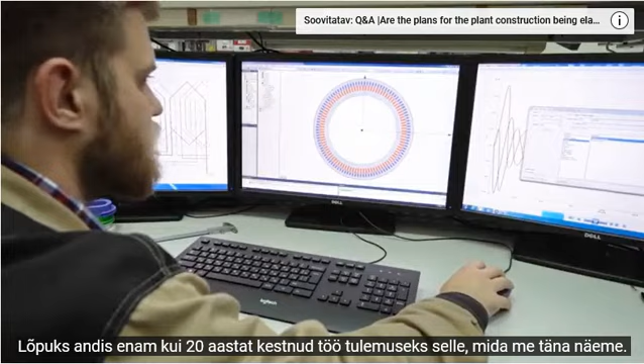Of course, it was only the first step, and there was a large scope of work for Duyunov's team down the road. There were patents obtained and research conducted. The combined winding technology was put in practice. Various induction electric motors were designed and modernized. Finally, more than 20 years of work resulted in what we can see today.

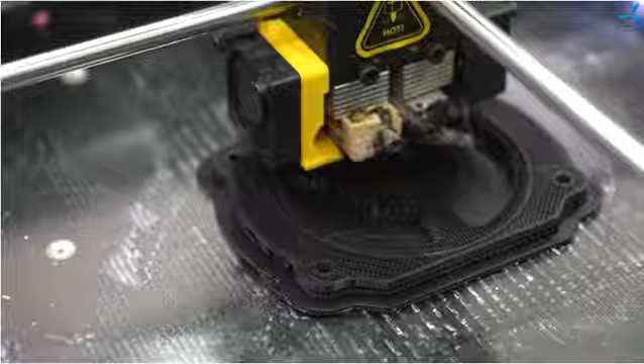Hello, I'm Alexander Sudarev. Today I want to discuss with you the global problems of mankind and ways of solving them. As you know, mankind aspires to automate all processes of life activity. These include line production and a large variety of electric devices, computers, robots, common mobile phones and other gadgets. All of them require a colossal amount of electric energy.

Currently, the main consumers of electric energy are induction motors and lighting. Let's talk in more detail about induction motors. They constitute the greater part of all electric motors in the world, about 80%. Let's delve into where they are used. They are applied in industry, agriculture, and public utilities as well as other areas.

No production can operate without drives, pumps, ventilators, transportation and conveyors, machine tools and lifting machines, as well as a large variety of other production machinery. Even common water supply and heating in your homes functions thanks to using induction electric motors.

And now let's talk about where you can come across induction electric motors daily. Every day you use a washing machine, refrigerator, dishwashing machine, microwave oven and hairdryer. If you're working with electric tools, you might use an electric screwdriver, drill, jigsaw, and a variety of other tools. All this equipment operates thanks to using electric motors.

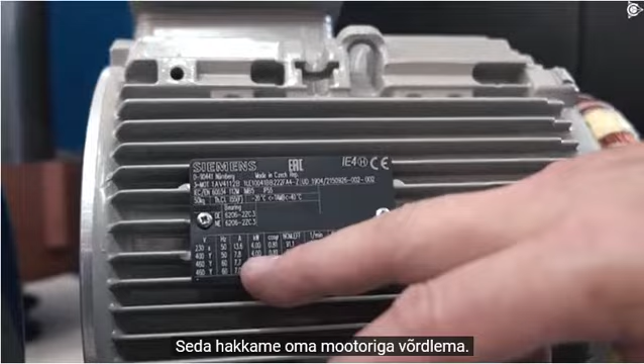So, we're in the laboratory of SovElMash, and I would like to show you what the difference between class IE4 electric motors and standard induction motors with classic winding is. Okay, we have one electric motor of the energy efficient class IE4. You can see it here on the nameplate. Class IE4 for various voltage and frequency. Consequently, the power is 4 kW. This is what we are to compare with our motor.

And so this is a regular motor and here is our motor. It's the same, the power is 4 kW. Now we are measuring the rotor length of IE4 motor and regular motor. For instance, the IE4 rotor length is 204 millimeters. Now let's have a look at regular motor. It's about 145 millimeters. Now the copper.

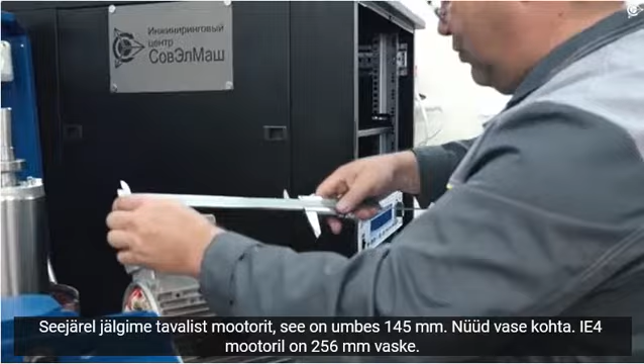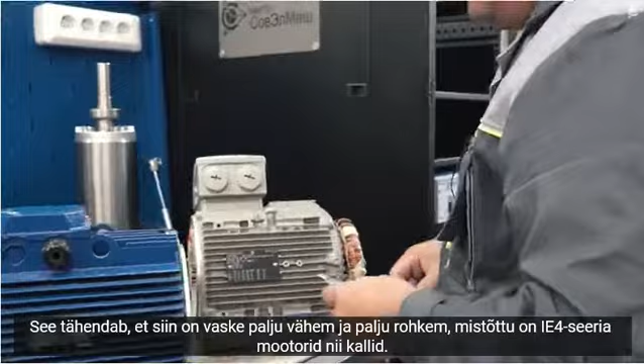The IE4 motor is 256 millimeters in the copper part. The standard one I can't measure accurately. I can touch the copper part from this side and on the other side it's somewhere deep in there. We can only measure it roughly, so it's 235 now, minus something that goes deep in there. About 15 millimeters minus is about 220 millimeters in total. So here there is less copper used and here consequently much more copper. That makes class IE4 motor so expensive.

I have told you about the motor. This motor is 4 kilowatt. We also have a class IE4 3 kilowatt motor. But unfortunately we don't have a regular motor, not an energy efficient one, with the same power. But we have a similar motor with the same diameter rotor, and we can see that it's almost 2 times shorter. Just to give an example.

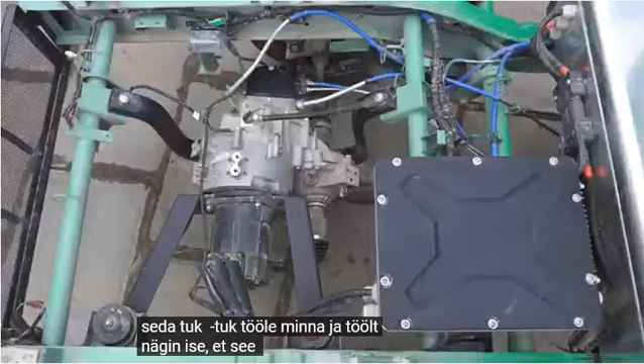I tried it myself. I sent my car to repairs, and I used this tuk-tuk to go to work and from work. I saw for myself that this vehicle is great. It is very resistant, very economical, easy to control, easy to run, easy to maintain. We sent it to the city of Kursk. It was used in a greenhouse business there, and it proved to be great. As of today, we have received a request for using it in the central park of Sochi as a mobile coffee shop. Now we need to take it from Kursk, equip it further and send it to Sochi.

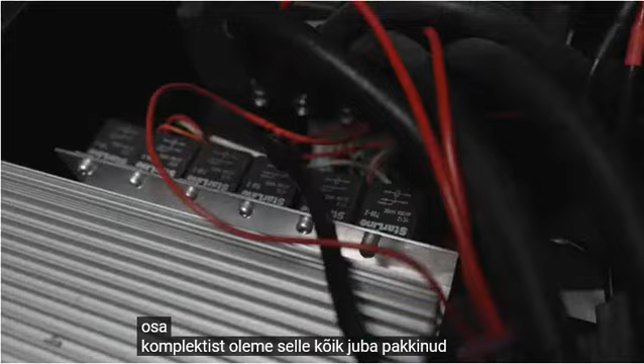And well, speaking of tuk-tuks, we have prepared 4 kits, the same kits. We prepared them for installing on the same Bajaj Maximas, and we included solar batteries and controllers for solar batteries in the kit. And of course, our motor, DA90S with combined windings, is also part of the kit. We have packed all of it already, and we are preparing it to be sent to India.

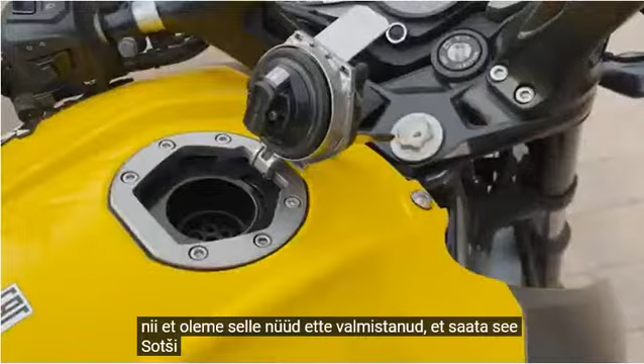So we have now prepared it to send it to Sochi. Snow does not allow us to test it here. There we have winding roads, slopes, and the climate is warmer. We will definitely know what distance it can cover, how it behaves, and whether this kit can be offered to our partners, because they have already seen it.

Birdi has visited us. I'm sure all of you know him. He had a ride and was delighted with this motorbike, especially that it is an Indian model. We exchange messages with Birdi Kumar, we call each other, and we talk about how to promote this project further.

And another interesting piece of news. Several months ago we received a commercial order. A large company came to speak to us - a holiday center, a resort. The director told us that it was prohibited to use gas transport in the Chelyabinsk region - no gas transport at all, neither water transport nor automobile transport, nothing. But as fishermen and tourists, everyone who likes resting in the mountains, in beautiful places, at the lake, they have to get around somehow.

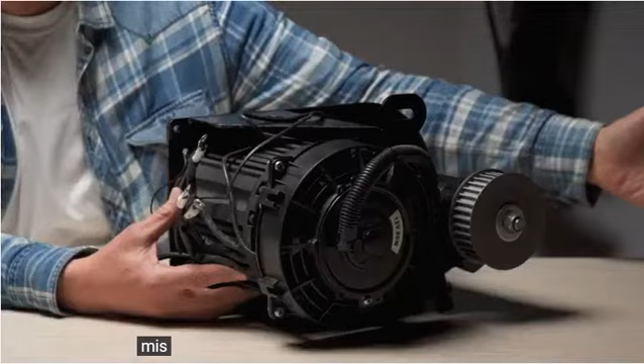We installed this reductor there with the motor DA90SM, with a cooling system, with a ventilator, with this pulley which transfers the reduction ratio to the wheels of the go-kart. And our guest had a ride on this model with a lot of pleasure.

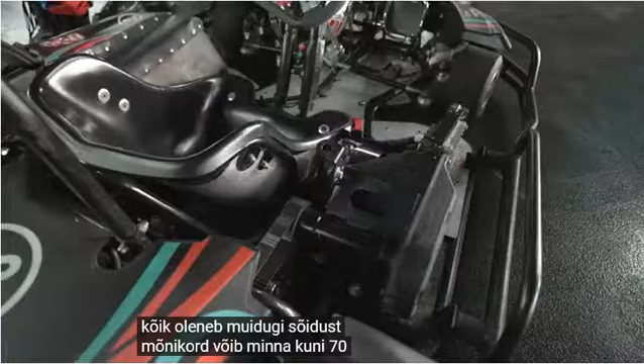I think that this is the best electrical go-kart as of today. It is very economical. It allows you to run for 60 minutes in the rental mode. Everything depends on the rider, of course - sometimes you can go for up to 70 minutes. That's 6 to 7 runs, 10 minutes each. This is a lot.

For example, today a Latvian kit, which is installed on such go-karts with a BLDC motor, can only run for 10 minutes. As for the others, I can't tell you much, because today electrical go-karts are really rare - there are very few models. We have entered this domain and we're testing it, eliminating failures and errors. I think we will be finished with this kit very soon.

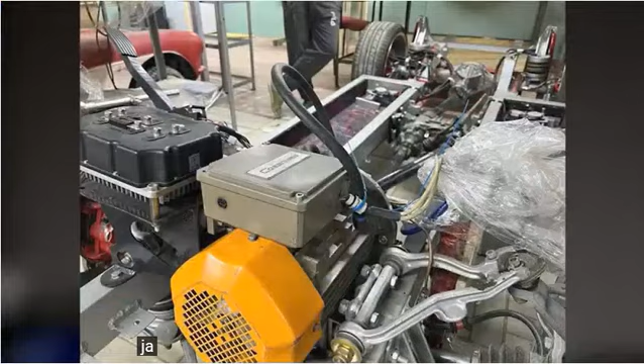Another interesting project, to my mind, is that we got an order to install our motor on a mini Geländewagen, an automobile for children. It was quite a difficult order because the car and the frame themselves were already fabricated, and it was very difficult to get into the spots left for our motor. The motor is big, but we coped with the task.

We installed our motor, we developed a reductor for it. The client was generally happy. The car is functioning well - it can go over curbs, go up slopes, run in the sand. A real Geländewagen, a real cross-country vehicle.

Well, friends, on this I think I will finish with the news. There are a lot of projects, a lot of orders, but they are not yet started - they only exist on paper for the moment. This is it in terms of interesting things which have happened. It's not that we disappeared, it's just that we were working really hard. We'll keep in touch - follow us. As soon as something interesting comes up, I will make sure to share it with you.

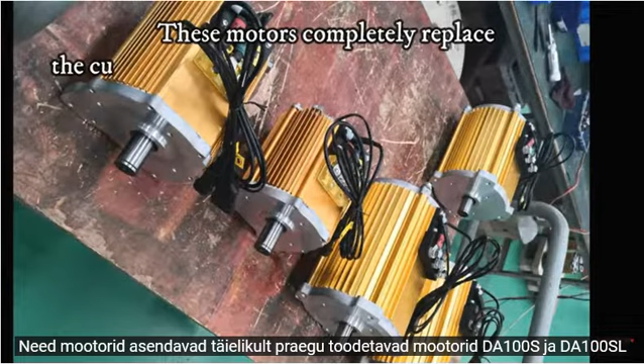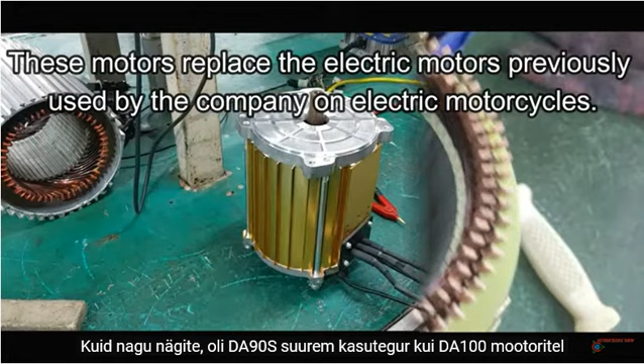Как я уже сообщал раньше, эти моторы полностью сменят моторы серии DA100S и DA100SL. Многие задают вопросы, почему это происходит. Ответ простой: эти моторы имеют гораздо более высокий КПД, выше эффективность, большую скорость и больший крутящий момент. Те, кто знаком с электромоторами, знают, что электромоторы большего габарита имеют более высокую эффективность. В нашем же случае DA90S имел эффективность выше, чем моторы габарита DA100. Поэтому и была цель создать новые моторы.

Эти новые моторы были сделаны на основе существующих китайских приводных моторов, но с полной заменой обмоток и статора двигателя. Моторы прошли независимые тесты в лаборатории завода, в очень хорошо оборудованной лаборатории, и показали очень хорошие параметры.

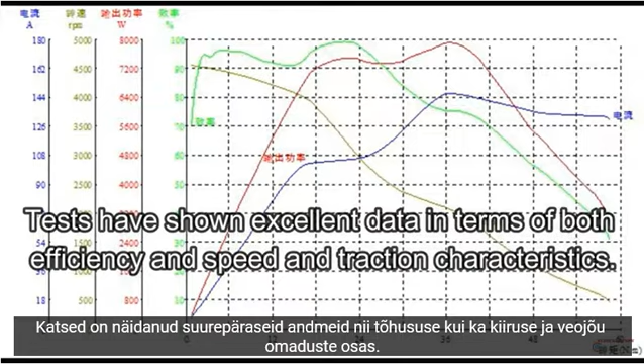Поэтому было принято решение полностью сменить серию DA100 на серию DA95, тем более что этот мотор намного меньше по весу и имеет намного лучшие характеристики. В настоящее время эти моторы приняты в эксплуатацию заводом UP Power Motors и будут устанавливаться в ряде серийных мотоциклов.

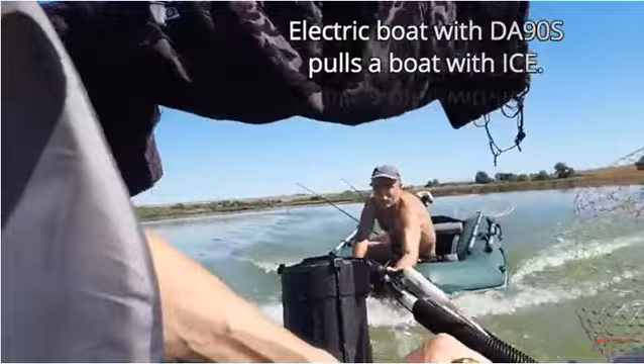Маныч, газуй. От винта, от винта. Он держит, видишь? Типа отпусти. Сорвешь — осадок улетит. Хвостом. Дырка в лодке. Буксир у нас, на буксир тащит.

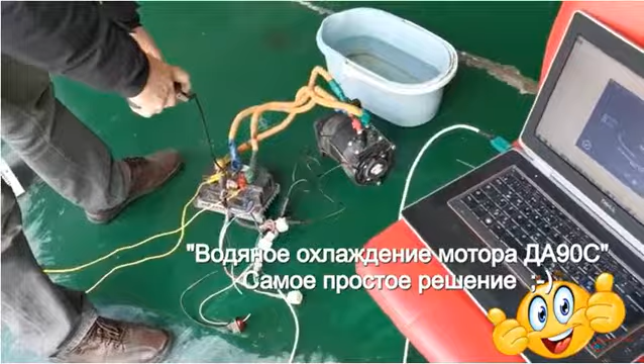Показываем, как наши моторы защищены от воды и от грязи. Это мотор DA90S. Как работают наши моторы даже в воде — полностью защищены от воды, и без проблем можно погружать их в воду и в грязь.

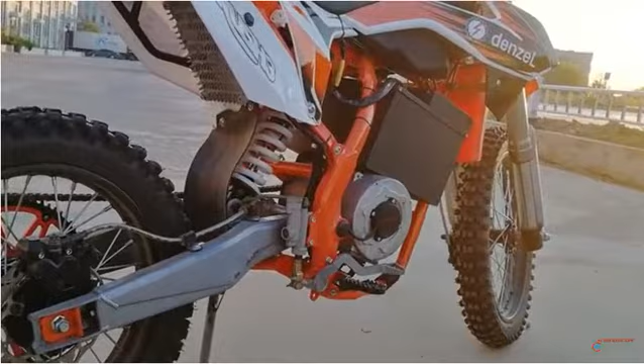В данный момент мы используем батареи, способные отдавать 80 ампер постоянного тока и кратковременно в пике до 160 ампер. С этой батареей целесообразно использовать наш контроллер DECA 165, позволяющий отдавать 165 ампер фазного тока. Мотор развивает при этом до 50 ньютон-метров, а на колесе мы получаем от 250 до 320 ньютон-метров. Что можно сделать с этими моментами, вы видите сами.

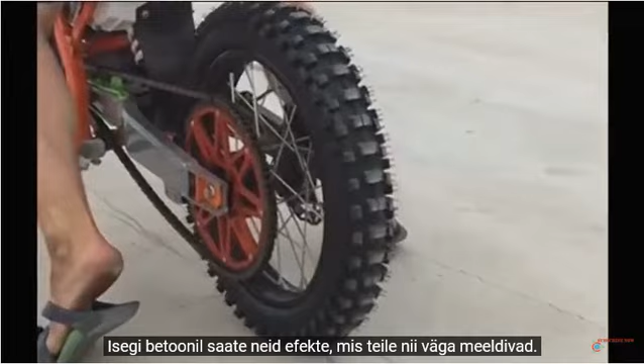Даже на бетоне с этими амперами и с этим моментом можно создать те эффекты, которые вы очень любите. С 350 амперами мы получим моменты более чем в 2 раза больше, чем сейчас с этим контроллером и с этой батареей.

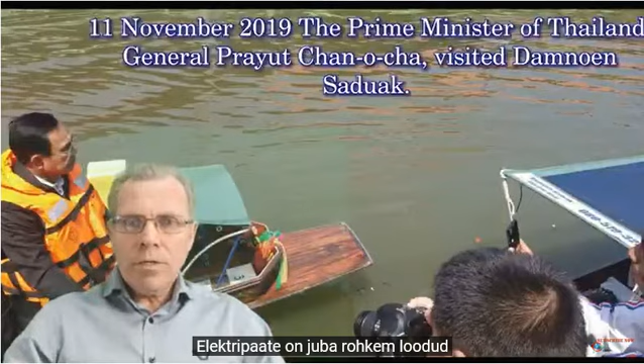Будут созданы электролодки с солнечными панелями мощностью 1,1 кВт, что позволит заряжать батарею на 5,5 кВт-часов электроэнергии в день, что практически удвоит расстояние, которое сможет проходить электролодка на электричестве.

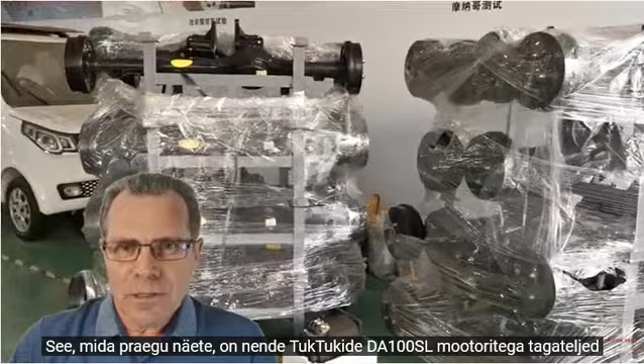В будущих видео вы узнаете еще об одном важном проекте, который мы ведем в Таиланде — это проект тук-туков. Как вы знаете, тук-туки — очень популярное средство передвижения в Таиланде. Наши приводы заняли первые призовые места в соревнованиях среди университетов и были признаны самыми экономичными приводами для этого вида транспорта. То, что вы видите сейчас — это задние оси для тук-туков под моторы DA100 SL, материал для будущего видео.

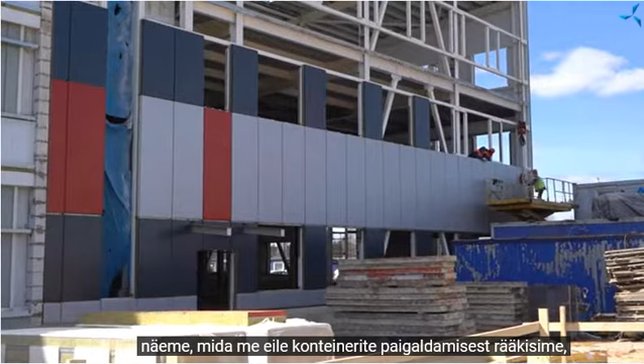So we are now in a different place, on the other side of the administrative building, and we see what we were speaking about. Mounting continues. Yesterday, 2 floors were covered with those panels. It is moving on, and very soon one of the walls will be finished. Now let's move a little bit and see yet another problem.

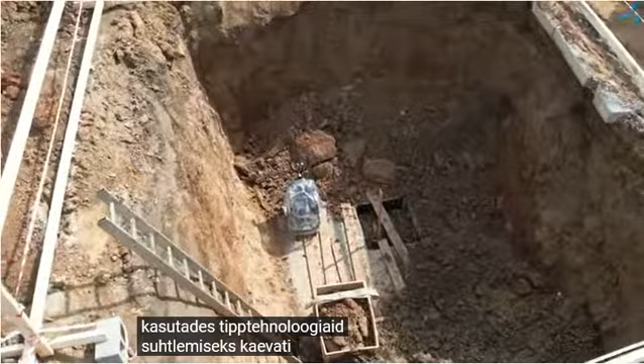Here is the second problem that we did not show to you. This is the achievement of the glorious company Alpha Stroy. It was done really greatly, using cutting-edge technologies. A pit was dug for a communication well, and then it just collapsed. Because according to the norms and standards, 2 meters or more should be supported, or slopes should be made for that. But they did not do it correctly, and that is why work was stopped.

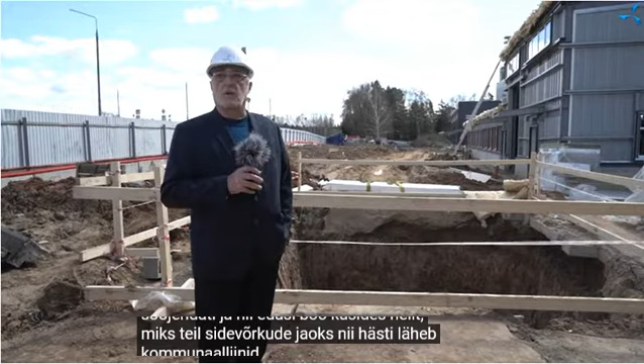It was stopped immediately, until things would be fixed. But still you see that it was demounted, it was heated up, and so on. We were asking them why. Why are you doing that? Well, for communication networks, for utility lines.

Alpha Stroy Company, well, remember them. Remember these heroes. This is how they work. And it led to stopping of work. But they want a lot of money for their utility lines, a lot of money.

And now we are fighting over cost estimates, because in the cost estimates they charged us for removing the ground. Here is the ground, so there was that extra soil, because backfilling will be done with sand. They wanted 1,000 rubles per ton. I don't know such prices.

Because removal is usually calculated in cubic meters, and in cubic meters it's 1,750 rubles per cubic meter. They have quite a good appetite, telling me our price is perfect according to the market. It is not a market, it is a real bazaar. And we have to stop such things all the time. We have a capital development direction that solves such issues all the time, and they do come up all the time.

In addition, this construction could have stopped many times. One of the reasons was that when we were engaged in the acceptance procedure with one of our technical suppliers, we saw a deviation of one of the columns, and all the construction was stopped until the developers of this construction, Estron, had completed all engineering calculations and showed that the deviation did not impact the bearing capacity of the construction, but still there was that suspension of work, that stopping.

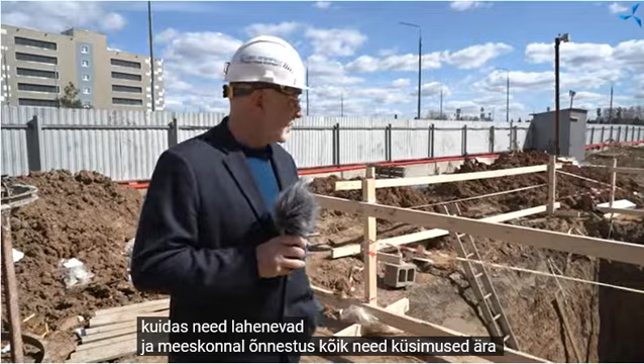And then they tell us fairy tales about different things, and they are not fairy tales, what I'm speaking to you about is reality. It was also true concerning other things. It happens regularly, but the main thing is not that we have them, it is inevitable. The main thing is how they are solved. And the team managed to solve all those issues and not allow for a situation when somebody would be crushed in that pit. There were many similar situations, much more serious, much more tense ones, but they were all solved.

So don't think that it is, you know, like red carpets here. No, they are rather thorns. Thorns and thorns, once again. Nothing but thistles. And we just struggle along.

And now there is a big meeting here on the construction site. All managers have come. They are solving disputes, problems which emerge. I go there very rarely, because when I do go there, I just say my last word. And then when I say that last word, very strict measures follow. Now let's speak about interesting things. Let's go up.

Look, we're now in the ears of Cheburashka. And there are these holes in front of me. Why were they dug? It is drilling of ground. It is done to check the temperature below. And measurements showed that the temperature was negative. So before pouring all of it, before doing concrete foundation, we will need to heat it up. Because it will take a lot of time to melt itself, and that will slow down the process of construction.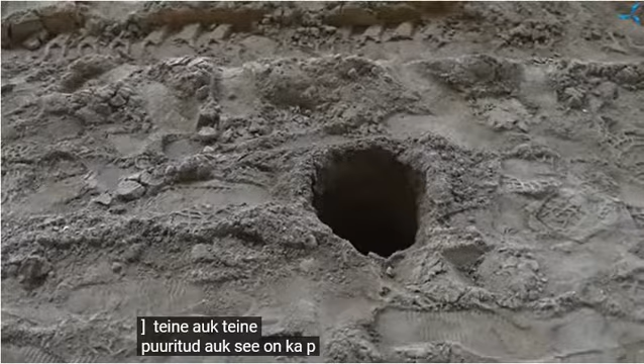Let's look at heating up. Let's go. Here is another hole, another drilled hole. It is the main part of the building, measurement of temperature as well. Now look, dear colleagues. Here we see the station which heats up the heat conductor. The heat conductor travels in hoses covered with canvas, and then it goes to that part. And there under canvas, let's go look. Here under canvas, hoses are put.

We'll now try the temperature. Warm, they're warm. So they're heating up the ground. After the ground melts in this part, they will do compacting after winter, backfilling, thermal insulation along the contour, and concrete foundation pouring.

We will now see how concrete foundation work has been done in the warehouse part. We have already shown it, I think. But now it looks very different. If we look at it from the outside, without curtains, without anything, here it is, concrete foundation. It has been completed, and temperature has also been measured here, and then they will just be connected. The main thing is that now we have the possibility to continue work in parallel.

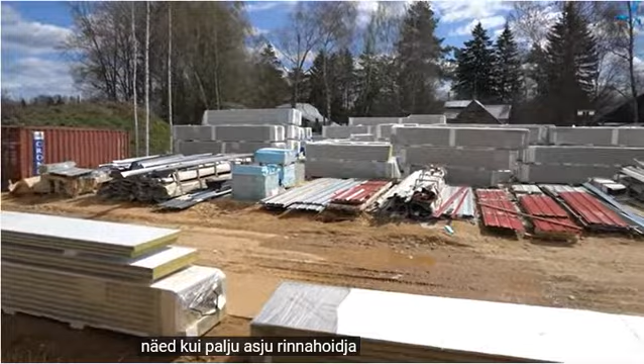Now we will go have a look at another interesting thing. Warehouse where materials are stocked. It was in the back part of the building. We were waiting for so long for it to be cleared. But, well, the building is growing, and the warehouse does not get smaller, it seems. The cameraman will show it to you. A view from here. You see how many things there are in the warehouse. A lot of partitions, a lot of panels, metal constructions. All of that is still to be mounted in the building. And now let's go on the second floor.

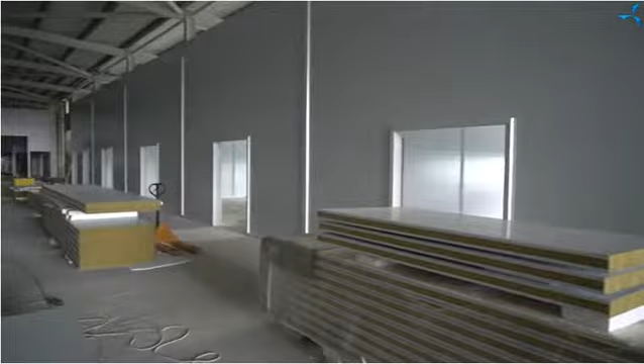We are on the second floor. And you see what has been done here in the last several days. Baseboards have already been installed in the bottom part. Joints were covered with casings. Casings were put on door frames. So things look more complete here, gradually. And after baseboards are installed, pouring of the floor can be performed. Now the cameraman will show you what it looks like from the outside, and I will keep silent for a moment.

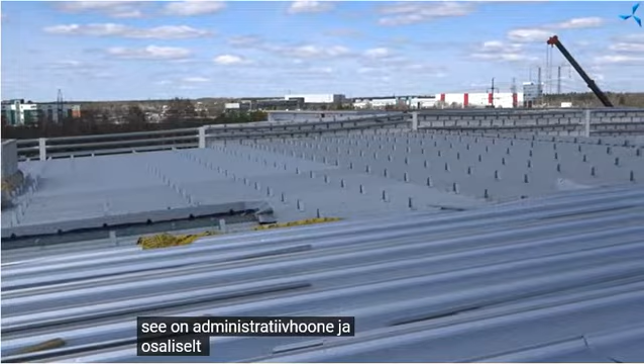We haven't been here together since New Year. Well, I have been here, of course, but we have not been here together. This is what a roof looks like. Well, before we used to look at snow piles here, and now we are on solid roof. Scope of work which remains is not big. It is the administrative building and partially the industrial one. And we see the scale of all of it much better from here. Things that have been done in the last year, despite problems, despite issues.

Whatever happened, whatever was there, is the past. I hope and I'm sure that we'll have more interesting events in the future, commissioning the facility and the first products that we'll produce. It is in our hands. It is in your hands, and we will do what depends on us. Now, enough of talking, I think, and the cameraman will show you a little bit more things.